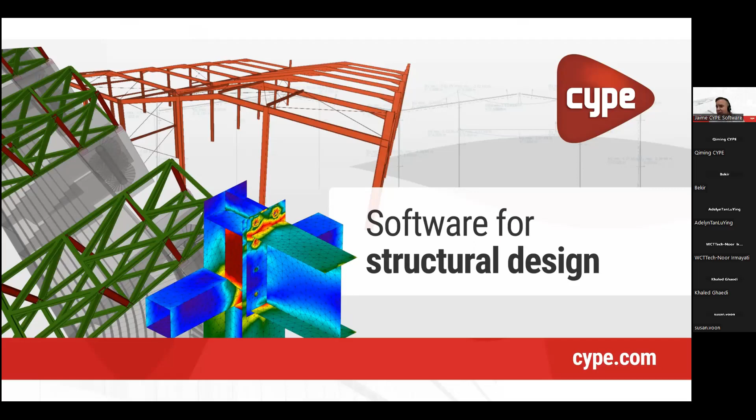So the program here does the foundation elements for you. It also does all the connections. And you can design a structure in this software, which is similar to STAAD, and then lay that structure over a project designed with this previous structure. So we could do combined structures with both software.

In addition, in steel, we have the entire solution of steel, because one of the problems nowadays in a lot of buildings, even though we have many standard connections included in our basic steel solution, you end up getting to the point that there's always a new type of connection or a complex type of connection. We're also able to solve those in our modelers, and we're able to design complex steel connections and then do a finite element analysis. This is a program we call CYPE Connect, and it uses the OpenSees analysis engine.

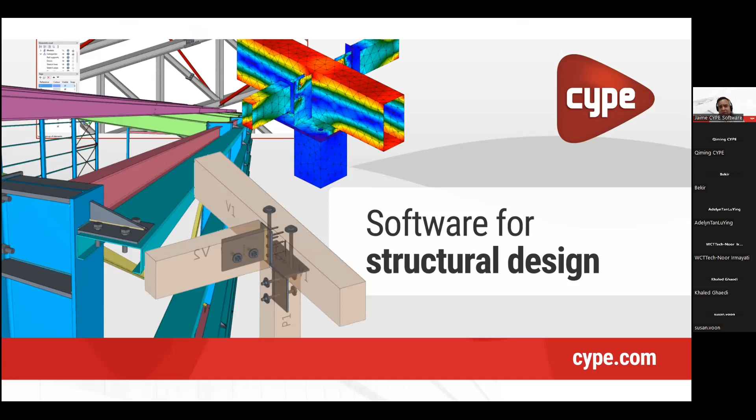And furthermore, if you need to do assembly of this structure, we have a program that will also allow you to do all of the structural assembly parts for the assembly of this steel building. You're even able to generate a step file or a DSTV file, which is the more common file being used in CNC machines.

Now, everything that I've spoken about is able to be shared into a BIM project, and not just in structures, also in MEP. In MEP, we have a wide range of solutions for pretty much any sort of building, stemming from HVAC, electrical systems, fire protection, as well as plumbing.

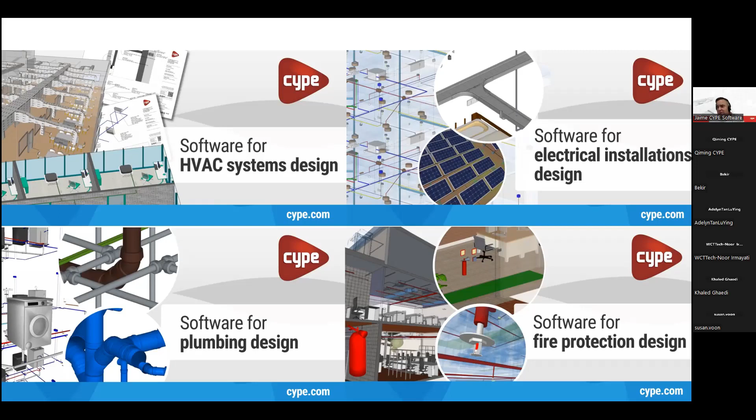But sometimes previous to this step, it's important, for example for HVAC, to be able to determine the energy consumption of your buildings. So we have solutions for determining energy consumption and for you to determine thermal loads of your installations. When you design the thermal loads, we have a program connected to the ASHRAE Radiant Time Series for you to check the location.

And then once you've determined the thermal loads of the building, you're able to do a simulation of your energy consumption, including the HVAC consumption. This program for energy analysis uses the Energy Plus engine, which was designed by the US Department of Energy for doing energy analysis. It's really one of the best because it gives you a whole annual energy balance of the building previous to construction. But we also have solutions for you to improve your energy consumption.

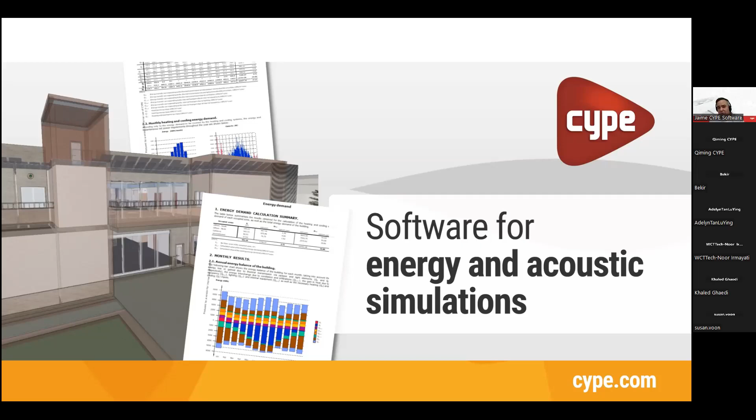And again, if you're working with a BIM project, the great thing is that you're able to import all of those construction elements and architectural model and take it into account in your design. And now we go just a little further, and that's pretty much the end of our ecosystem.

We have solutions for project management as well. We obviously have solutions for you to design all your health and safety features of a building or any project you're working on. But what I think is a bit more interesting is that we have a program called Open BIM Quantities, and this program extracts the quantities of BIM models automatically.

If there is a change in the BIM model, you're able to update it. I know probably in your market you're very used to working with programs such as Cubicost or Glodon and this type. These modelers particularly work with 2D CAD drawings, so you have to take into account many different rules of measurement and stuff.

When you're working with BIM, you don't have that issue because every element is a separate element and you can have the program recognize the measurement itself. It does have a section for you to enter a set of measurement rules, but the great thing is that when it comes to measurement, it's not on a 2D CAD drawing, even though that is possible. When you're able to extract quantities from a BIM model, it's a lot easier.

Now, like I said, we offer a workflow via a website called BIM Server Center, which is completely free and completely optional. BIM Server Center is a CDE platform that we created. We've been involved in many research projects around the world, and this is from one of our research projects with the European community, the Horizon 2020. We developed this common data environment.

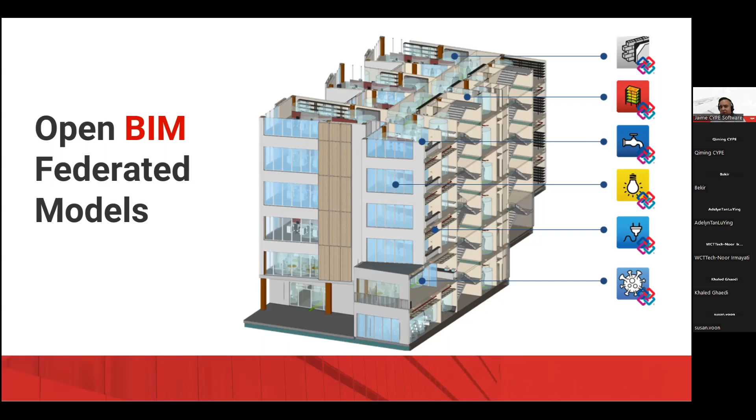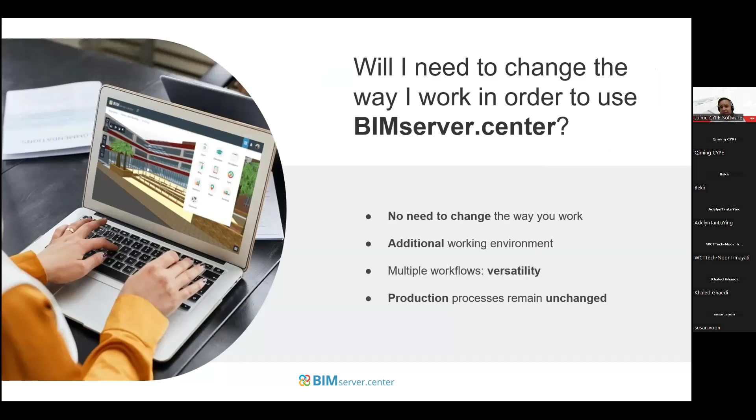Every time one person updates something in the model, everybody will be informed, and if there are any changes they need to do, they would be automatically informed as well. It's not something where they have to wait for one person to update everything so everybody else can work. It's a bit of a different way of working, but it's very good at optimizing your workflow. The great thing is you're not going to need to change a lot of things you're doing now — some things you might, because you choose to, but other things you don't.

What I mean is that you're able to import information from other modelers. What we mostly communicate with is the architectural model. We cannot import other parts of the project from modelers like Revit, Graphisoft, or Allplan, because our software — whether it's MEP, structure, or any other design — requires you to actually design in our software, since we run an analysis.

For example, in Revit, the MEP installations are only eye candy, just a drawing, with no real analysis behind it. In all of our MEP solutions, there's an analysis based on an ISO standard, so we need to redraw this item because this is going to be the actual as-built drawing.

But the great thing is that if you receive a Revit model, you are able to import, for example, all of the pipes, and you will have a reference line to draw in our software when it comes to MEP.

So just summing up, now we'll open up a program. If Khaled, you can start maybe with structures. In CYPE, all of our software is going to automatically generate a 3D model, whether you're working with MEP or structures.

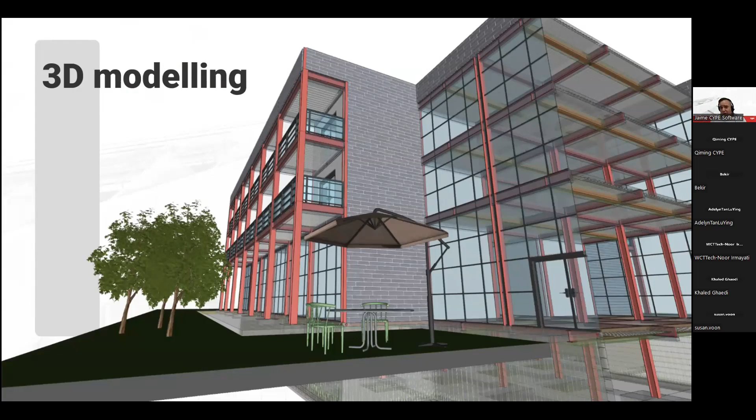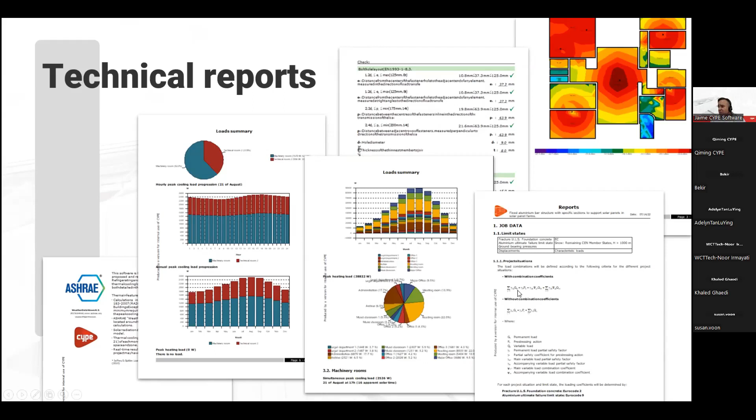We're also going to generate technical reports. You will see that all of our software is not a black box — you're able to view reports from contour plot maps when it comes to structures, and also look at the code checks, which will tell you if the code has passed or failed. If it has failed, it will tell you why, so you can analyze your design and redo it. You'll also see summaries of loads or different types of reports, and the formulas are always available for you.

In addition to reports, we also generate drawings. We generate different drawings that, if not exactly to your liking, you can fully customize using our program. Many times, these drawings can be sent over to AutoCAD if you already have particular formats, and edited there. We have multiple options, including a program to generate full drawings if needed.

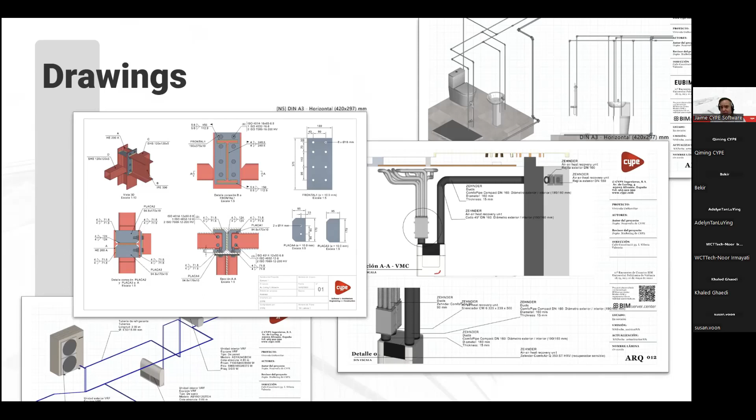Lastly, our software, whether for structures, MEP, or any part, also extracts quantities. You could generate a BOQ, not just for structures, but also for plumbing, electrical, any part of the MEP, even architecture, for everything or for sections. It really doesn't matter — it's quite simple to use.

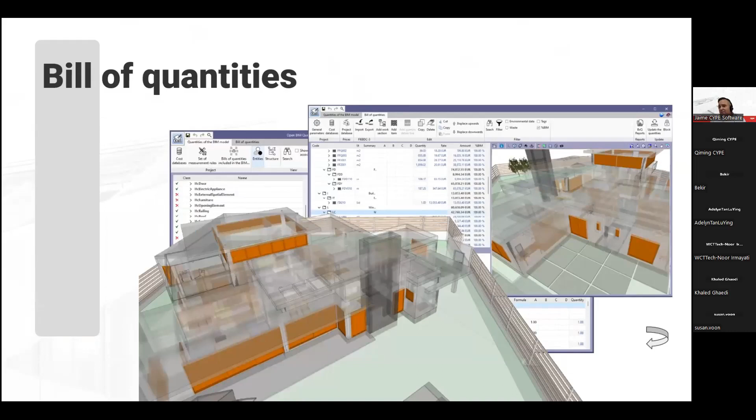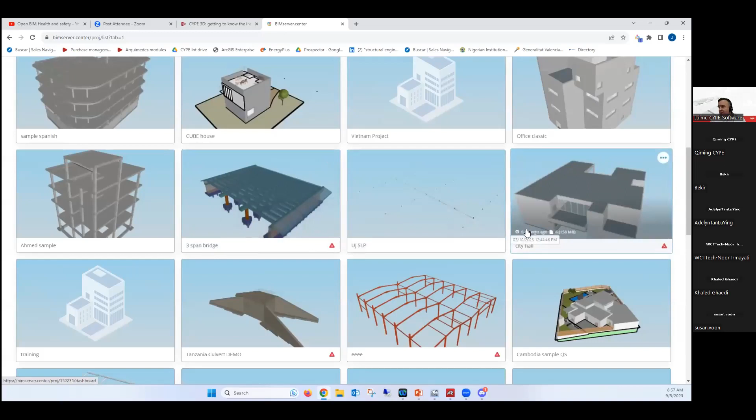In my project management area, I have many different projects that have been shared with me. If I go into any of these files, I'd have this same dashboard, where I'm able to view all of the projects laid one on top of the other, all of the files. This is where I manage my notifications.

I'm just giving you an overview of this platform because it's not the point of this presentation, but we could get into it at any point and show you. We have here the contribution area with all the different files in this particular project. As you can see, sometimes it could even be a thermal load file or the installations itself. And the work team that is part of this project.

In addition, we have here the history tab, and we all know that in construction this is super important. I was a general contractor for over 15 years in the United States, and it's very important to keep a paper trail of anything that happens in these projects. Any notification, any change, any file that gets added, or anybody that you invite, is all automatically registered for you.

Now, obviously, one of the great things about this platform is that it's a cloud platform. I'm able to access this information you're looking at from this project.

From any cloud, I can access it from any browser on the net, and I would be able to see here all of my files, and I'd be able to use virtual reality and augmented reality apps as well to visualize the project at the job site, to check for possible clashes.

We also have automatic clash detection. In this file, we have all my structure, and in my structure, I have every single differentiated model based on every different possibility. So we're sharing a lot of information on these files. I can have the water installation, I can have the gas installation.

So there's a lot of different things that can be done with this. Now, with the augmented reality app, you'd be able to go to the actual job site and turn on and off some of these different sections, and this way you would be able to visualize if the design is good.

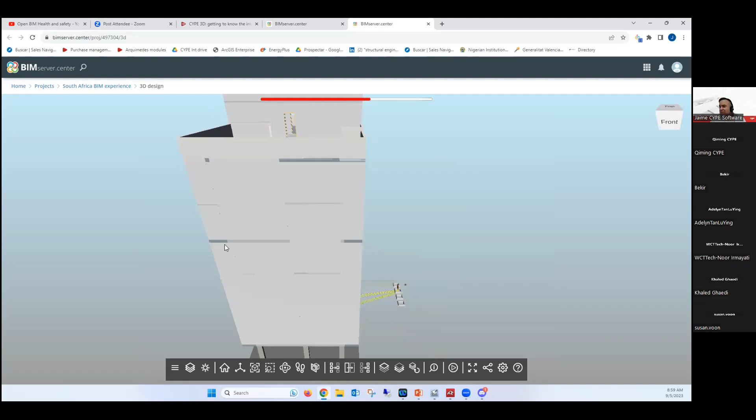Now in this particular platform, the great thing is that we're able to see the type of design. This is a BIM model, so everything that you see here is going to have also information on it - like this is an IFC wall. If I have something made out of a structural design, we would be able to also recognize these elements as well.

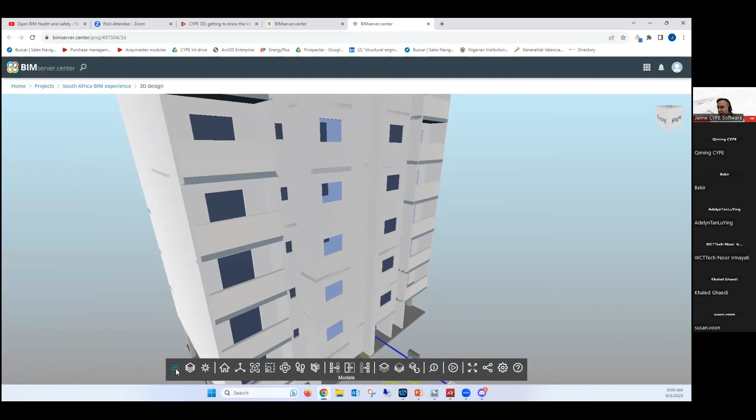As you can see, it's not just the structure that we have here - sorry, not just the architectural model. We have different files that we can turn on and off to be able to look at the MEP installations and also get information. We could check the flow of some of these sections as well.

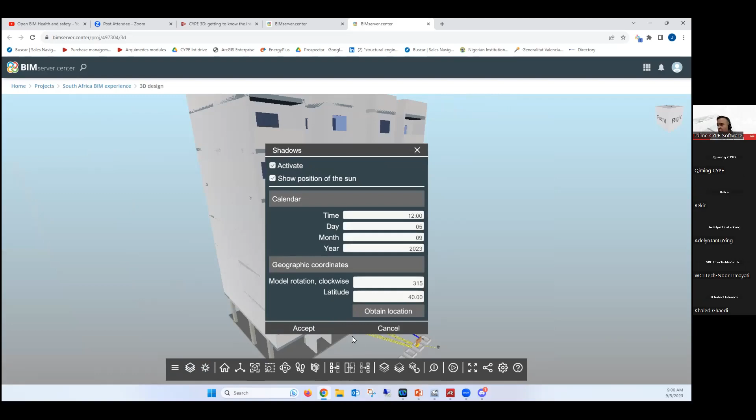And another great thing of this platform is that you can also turn on the shadows and activate the position of the sun based on the geographical coordinates that you've set. This is always very important when you do energy design.

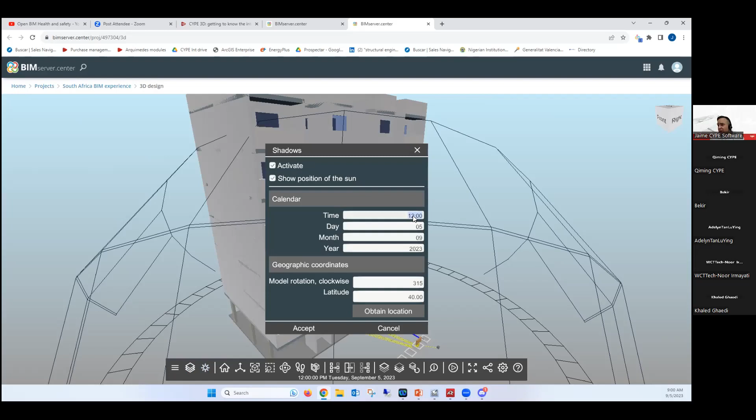And since we do a lot of different energy design and simulation, we always make sure that we can check the sun's path, because one of the great things about BIM is that you are able to visualize the project before laying one brick in the ground, and you're able to make changes that adapt to the needs that you're looking at.

So, based on the time of the day, you would be able to see the sun's position, and you would be able to see if maybe the location of the solar panels that you've chosen are good or not. There's a lot of different options.

But it's not only, like I said, documents that are for visualization. You're also able to share in here PDFs and many different files.

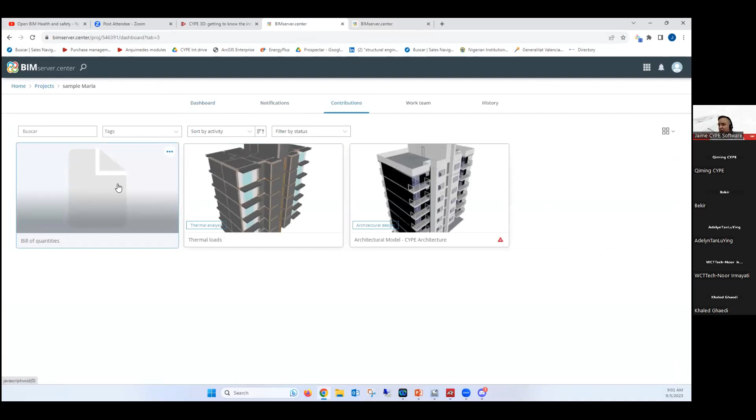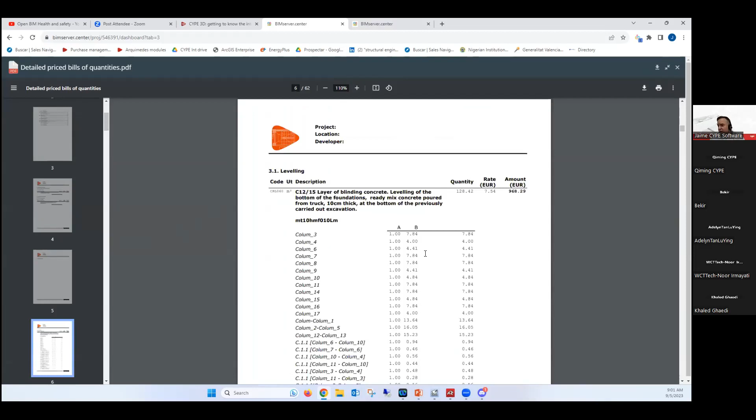For example, this is the same project, but in this one I have a BOQ as well that I generated. I've loaded this BOQ from the modeler, and I have access to my BOQ here too - an entire priced bill of quantities. This is the way that we lay these out, generated from our software.

And just one last - sorry? So I ask the questions? Sure. The model that you show, is that a design model, or is that one already exported to the BIM model?

Well, this is a model that we designed in one of our programs called CYPE Architecture. And once the program was designed with CYPE Architecture, we have in all of our programs a certain button for you to be able to share that information into the cloud. So this building, we did the design of the architecture using CYPE Architecture, which is this program here. And then what we did is share that information to the cloud, and that was a starting point for us to design the rest of the project.

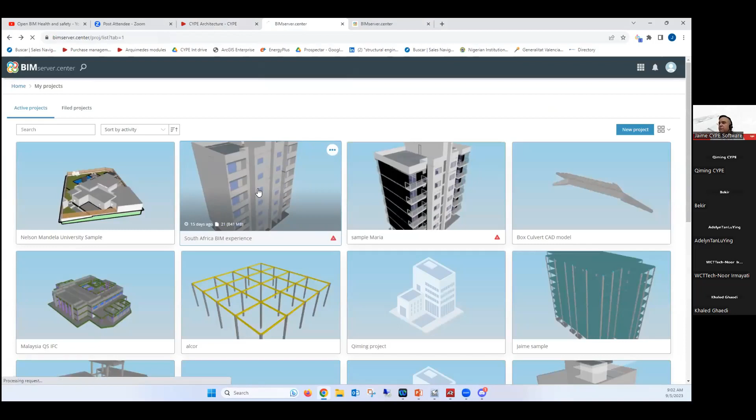You mean that you put it in the cloud for the next modeling, such as structure and also including the MEP inside? You mean that is a base? Correct - base building. The base is the architecture, or you could start from the base.

You could start from the site, site location, and then from there move on to the next step. But normally the first step is the architectural BIM model. And then what I do here, for example, you'll see in all my contributions, I had 2 architectural models - this one is not locked. The one I ended up choosing was this one.

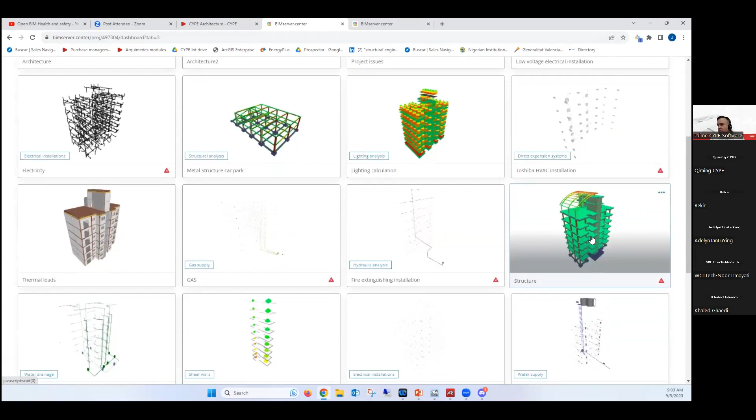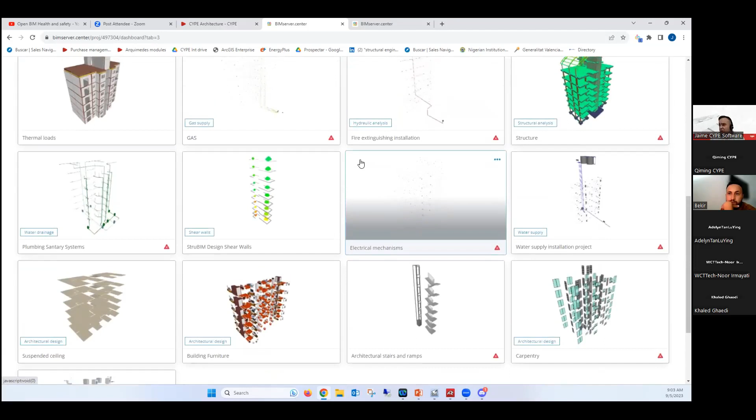I also had a couple of designs that were presented to me when it comes to structures. You can invite people to this project, and they will share files with you. When you select the file, you lock it in place. Afterwards you can delete the ones you don't choose, but the ones you do choose are all available for you to visualize. Whoever's managing each of these models is in charge of any modifications.

Let me give you an example. Let's say I have visually inspected a problem with the fire protection model, and I tell my guy doing fire protection that the sprinklers are offset. Now this allows me to choose who should do the change. Should I ask the architect to change the building? No, that's not going to be a good solution. If it's clashing with a plumbing pipe, I can ask one or the other. But in this case, I'm going to have the fire extinguishing installations moved, and I'll tell them to center the sprinkler in all hallways. Now I'm able to drag and drop an image, or browse.

Normally you would just take a snapshot of whatever the problem is, and then enter it. I'm just putting here a random image that I might have, and I tell them, okay, this is the problem. Now automatically the person that has this issue is going to get informed.